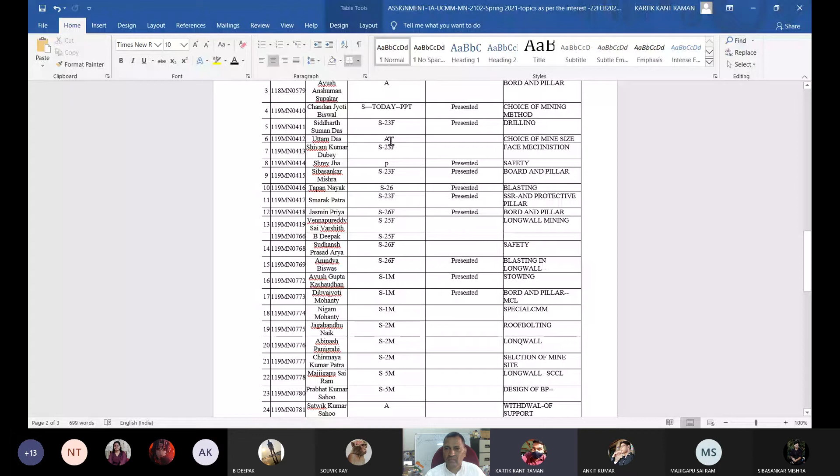Now you learn the skill of organizing even a conference. I wish that if not next year, at least when you are in final year, we will be conducting one national or international conference, as we used to conduct several times here in NIT Rourkela. So this is a training for you people. Now continue.

Excuse me sir, so can these people who are present already leave?

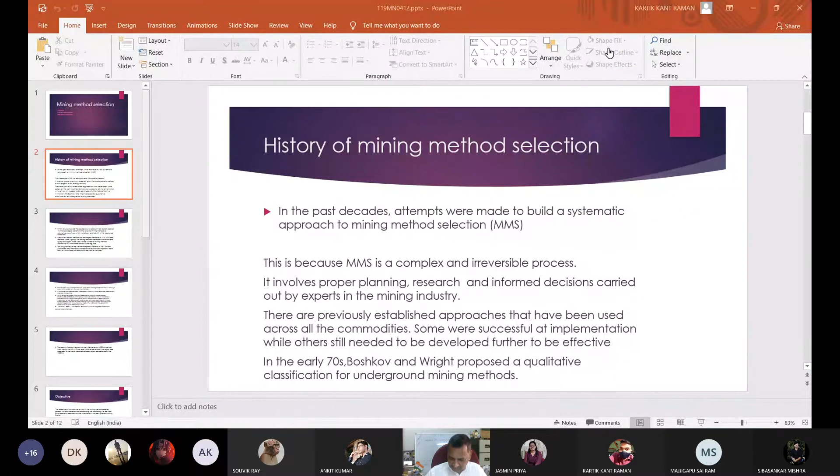Hello, there are so many options we have. Hello. Yes Uttam, yes I'm sharing my slides. So now Uttam is presenting. Yes sir.

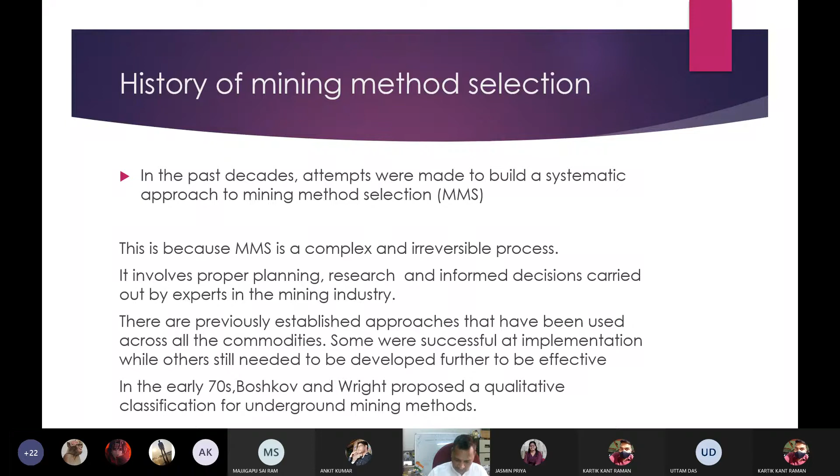In the early 70s, Boshkov and Wright proposed a qualitative classification for underground mining methods, which only considered geological and geotechnical factors applied in similar geological conditions. The selected mining methods as alternatives were those applied in similar geological conditions.

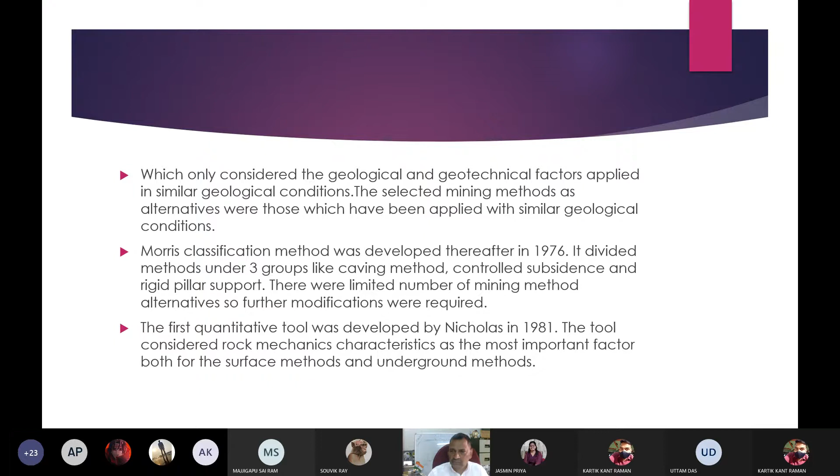The country that contributed the most information on MCDMs was Iran. Even though the USA, China, and Australia are some of the largest coal producers in the world, there has not been much concern about MCDM there.

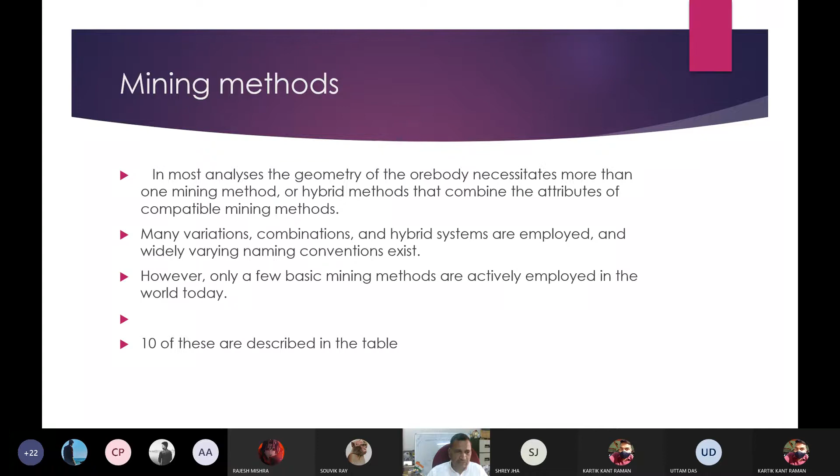In mining methods, in most analyses, the geometry of the ore body necessitates more than one mining method, or hybrid methods that combine the attributes of compatible mining methods. Many variations, combinations, and hybrid systems are employed, and widely varying naming conventions exist. Ten of these are described in the table.

Open pit mining (OPM) is the surface mining method for shallow, flat-dipping ore bodies that progresses deeper by mechanical means. Then there is block cave mining (BCM), an underground mining method for flat-dipping thick ore bodies that progresses upwards by means of self-sustaining cave progression. Then another is sub-level caving.

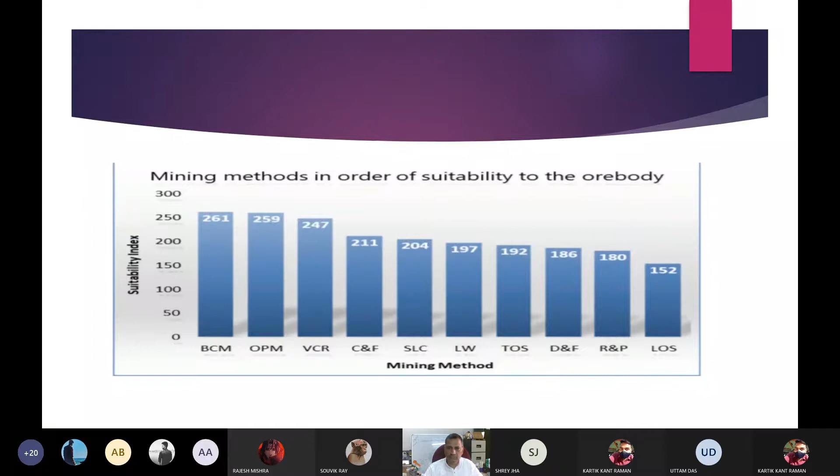This is the graph of mining methods in order of suitability to the ore body. The most suitable mining method is BCM, which is 261. Then OPM, VCR, cut and fill, SLC, longwall mining, and so on.

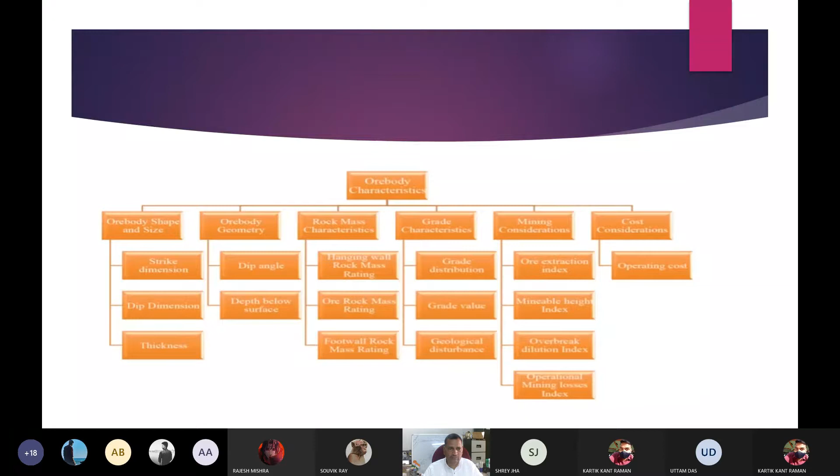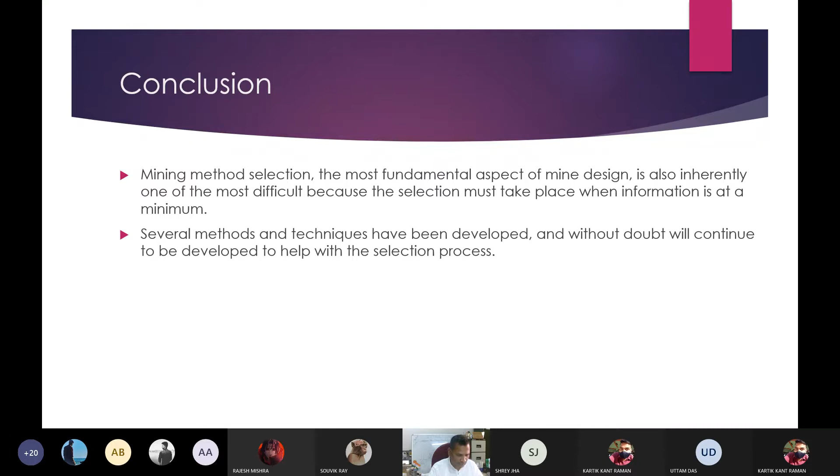Conclusion: mining method selection, the most fundamental aspect of mine design, is also inherently one of the most difficult because the selection must take place when information is at a minimum. Several methods and techniques have been developed and, without doubt, will continue to be developed to help with the selection process. Thank you.

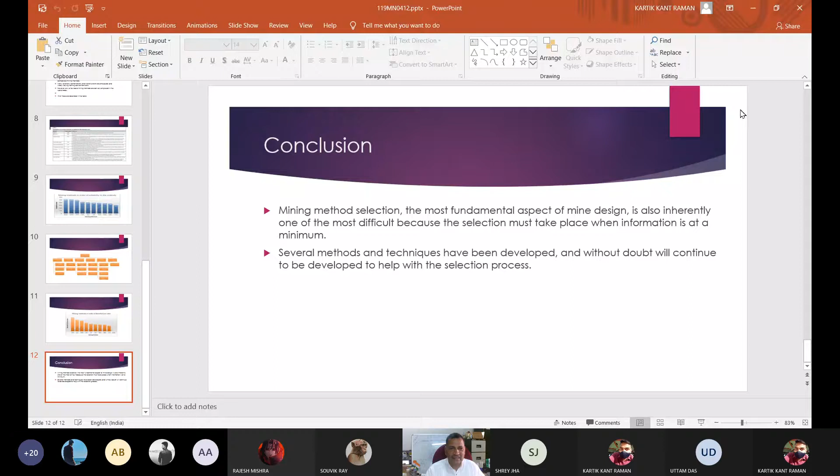What is the latest reference that you followed? Sir, I actually changed the slides a little bit, but I have the slide, I didn't share it with Kartik, so I wanted to share the slides. I understood it. What is the latest reference you followed? You've had 2-3 months for this assignment, you must know about these things. Is it a 2020 or 2019 reference, and which international journal format did you follow? Because these are the skills we wanted to improve. I hope you understood it. Yes, okay sir, no problem.

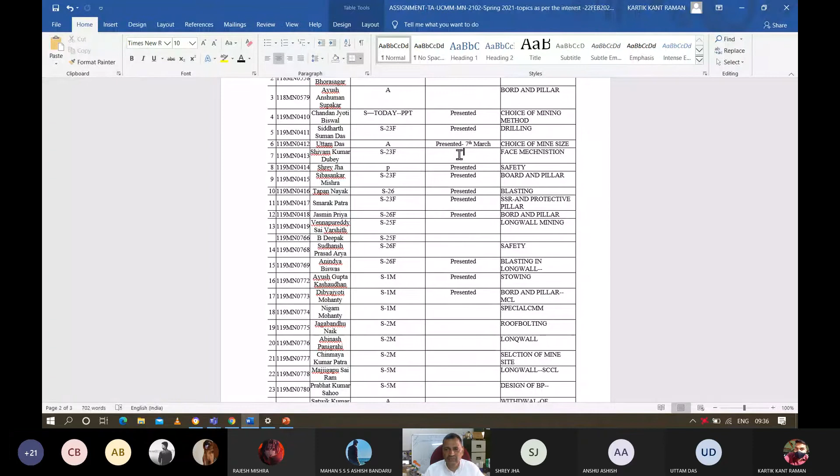So while others' PPT is displayed, please note down the trends in mining method selection, because there are so many parameters affecting the selection of mining method we have discussed, and the latest is that we can even utilize artificial intelligence or machine learning or that type of technique nowadays.

That is the AHP technique, you note down - Analytic Hierarchy Process, right? So you can see in our thesis, some students from BTech or MTech did projects under my guidance on selection of mining methods using AHP technique and other things. One PhD scholar, Bhanu Chandar, was also working on this - you may note down. Later he shifted, but initially he was working on selection of mining methods for different cases.

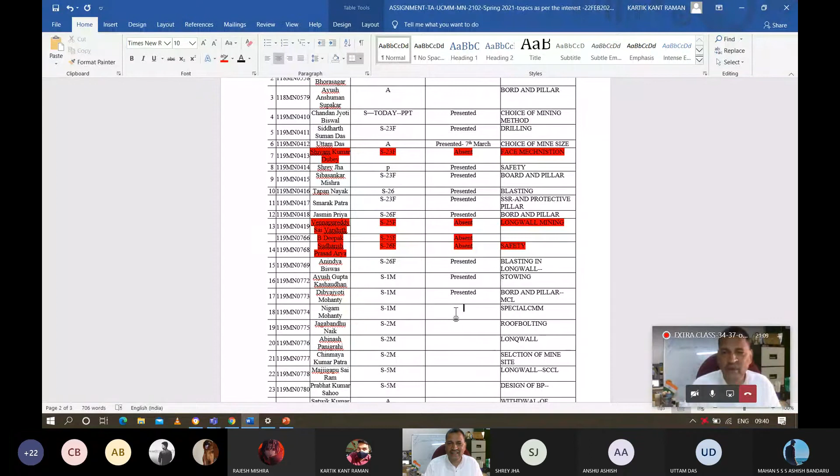Nigam, okay, Nigam. So Nigam is having some issues with his MS Teams. Actually, I don't know why. Everyone is having issues with MS Teams today. They are not responding to the problem. Let me know over WhatsApp. They can give their voice, your PPT, your YouTube link, you can play.

No sir, actually whatever YouTube link they have, they can play. Nigam, continue, can I present, sir? Yes, you first tell me the line.

Number 4 is Nigam. Number 5. Sir, Nigam is saying something, sir. No, let him say, but you tell me. Continue. Number 5. Who is number 5?

Jagabandhu Naik. Jagabandhu Naik, okay. Jagabandhu is number 5. Is he absent or present? Present, sir. Hello. Present, okay.

Then, yes sir. Jagabandhu, are you ready to present now? Continue. Yes, sir, Nigam, give it to Jagabandhu now. Display and continue. Jagabandhu, now time is 9:40.

What is the topic you will present? I will present, Jagabandhu, from 9:40 to 9:48. Completed, and 2 minutes for questions and answers.

These are the skills what we wanted to improve, so that you yourself will conduct later excellent international, national conferences. This is not to test your intelligence. You are all intelligent, my beloved students, right?

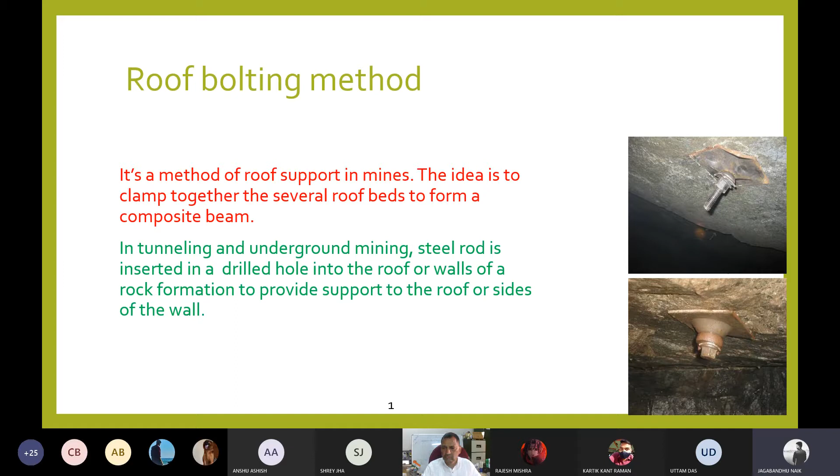Now let's see in Nandira Colliery UG mines. You can see here both roof bolts and bearing plates with their specifications. Considering these specifications, the design of roof bolts and bearing plates are manufactured. In Nandira Colliery, 0.8 meter of resin capsule followed by 1.5 meter of hexagonal roof rods was inserted in panel number WP3 and WP4 for roof bolting.

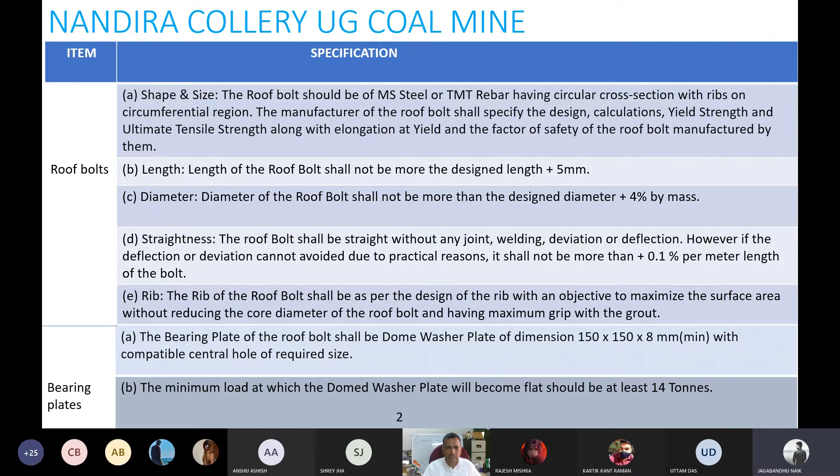Now, machinery used in Nandira Colliery. Hydraulic roof bolters are used for roof bolting in panel level WP3 and WP4. It is used to drill 27 to 43 diameter holes, and for flushing out the cuts from the roof, it uses high fluid pressure.

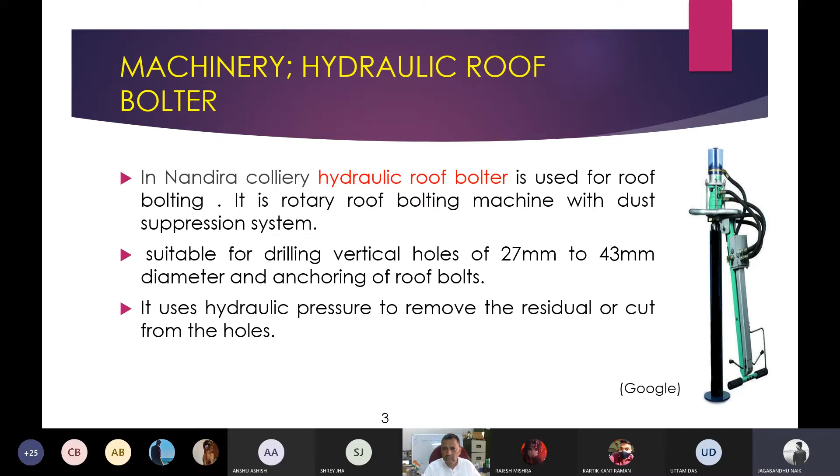Apart from that, universal drill machines are used in Nandira Colliery for roof bolting, as well as for anchoring the roof bolts. It's also used for short hole blasting. It can drill holes up to 38 to 63 diameter and 3 to 5 meter deep. It can work in gradient 1 in 4 and seam height up to 3.5.

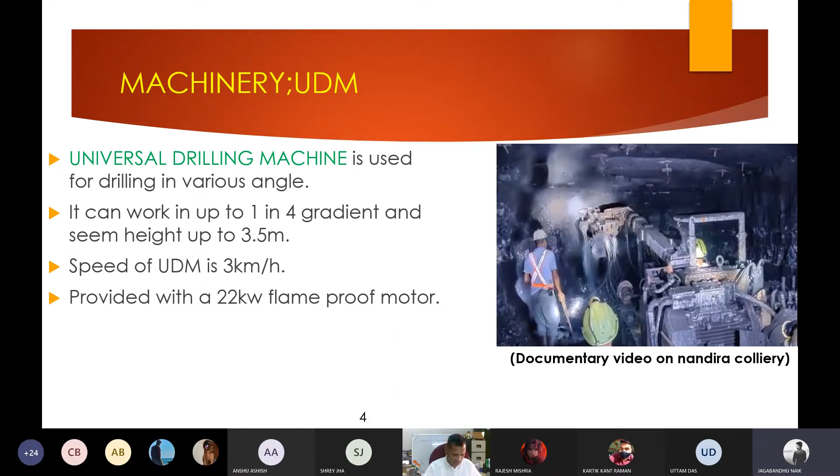To tackle this sort of problem, several tests are carried out using different lengths of rod and changing the shape of bearing plates in the Department of Mining, AGH University of Science and Technology.

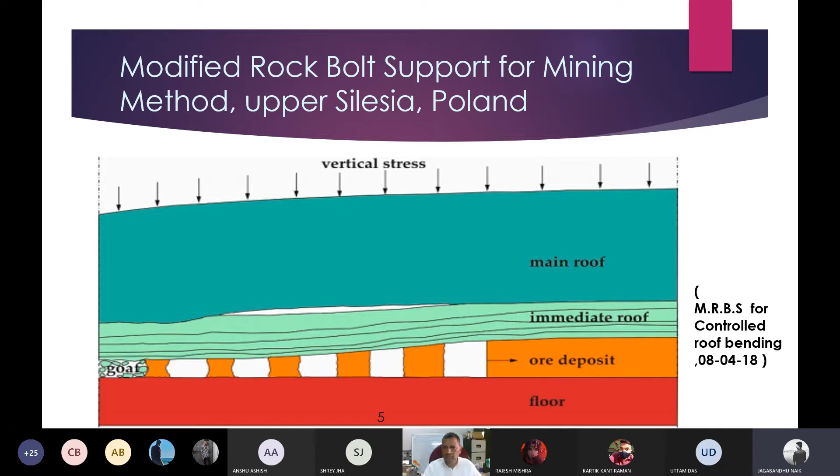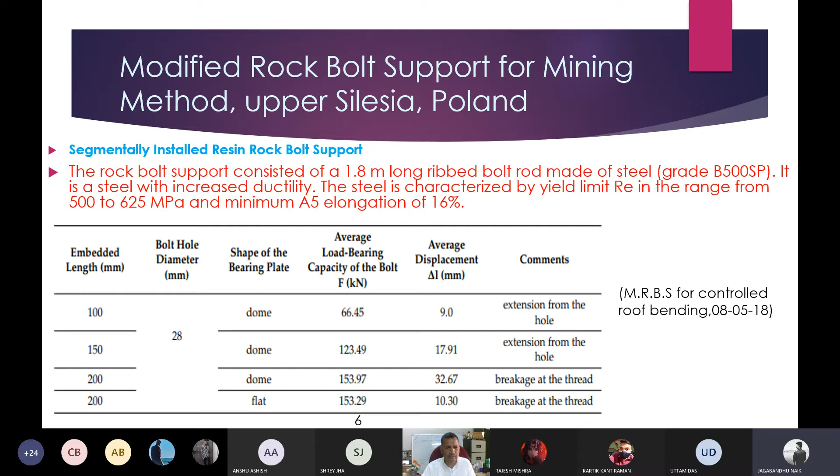Now, putting conclusion to my topic, the most important point to design a roof support system is to understand the roof condition, and for stability of the roof, it can be improved by suitable roof bolt support. And you can see these are the references I used for my assignment. That's all about my topic, sir. Thank you.

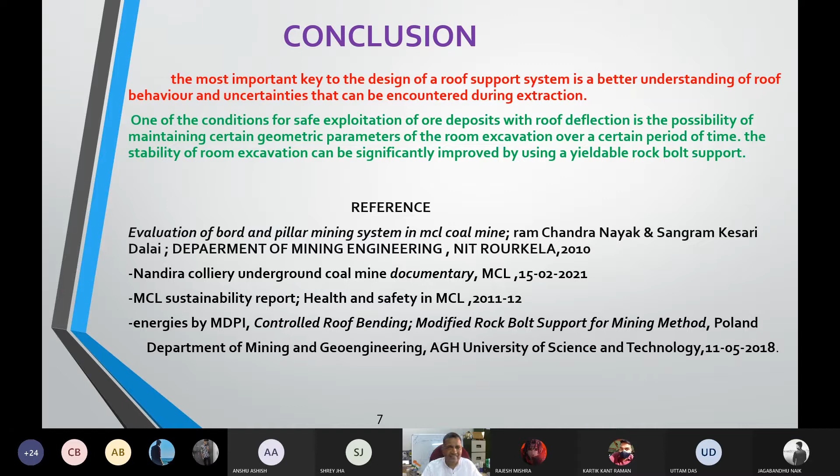Any questions for Jagabandhu? No problem, don't worry. Some of you, I thought, must have understood some good instructions to improve your skills, to collect the latest material, and make reading a habit of a good student. Okay, don't worry, whatever you could learn, you are at infancy now. Okay, continue, maintain the time and go ahead.

Anindya is next, sir, I will be presenting on his behalf. Who is presenting now? Anindya Biswas, number 3 today is Anindya Biswas. Yes, sir, I am presenting on his behalf. What is the meaning of you are presenting? The meaning is, sir, his net is sharing not the slide. I am sharing his slides and he is absent. No, sir, he is present. He is giving the voice. I am presenting his slides. That's right, that means you are displaying his PPT, right? Okay. Anindya, give me the access please.

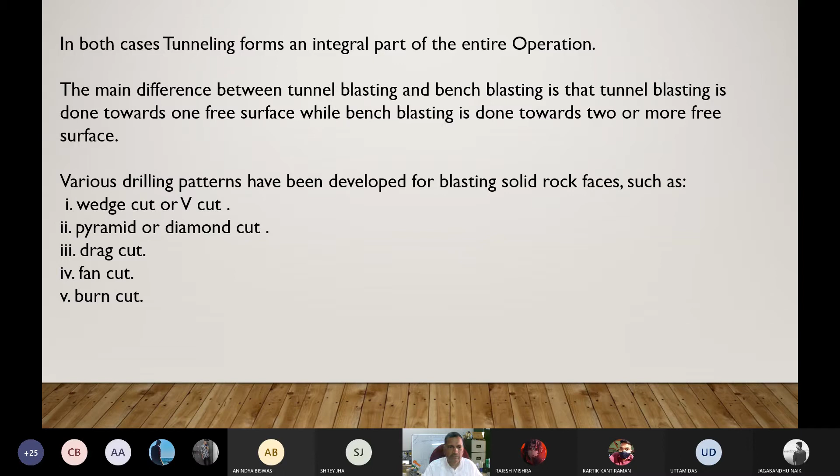Various drilling patterns have been developed for blasting solid rock faces, such as wedge cut, pyramid cut, drag cut, fan cut, and burn cut. Two important methods for blasting are detonation and shaft sinking.

Sequence of detonation: for both fragmentation and throw, blasting efficiency depends on the delayed sequence of blast or detonation. Delayed detonation improves loadability of the entire cut, contributes to better strata control, and reduces blast vibration.

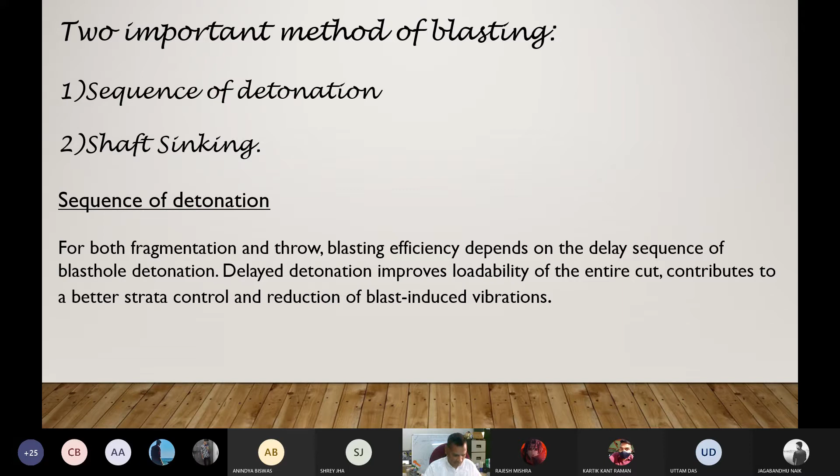Shaft sinking: in mining, shafts form a system of vertical or inclined passageways used for transportation of ore, refill, personnel, equipment, air, electricity, and ventilation. In quarrying, glory holes are used for transportation of materials, such as at Perak Hanjoong.

An important requirement in shaft sinking is to provide optimal fragmentation of the rock so that it can be cleared quickly from the congested shaft face area. Blasting operation is carried out against gravity, and the scatter of broken rock is confined in the shaft. It is common to use generous distribution of explosives throughout the rock using a large number of small diameter short holes.

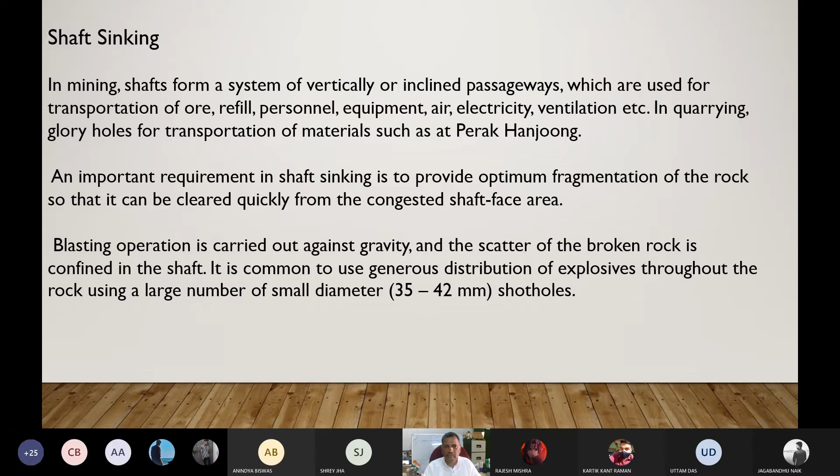Blasting in underground mines: underground mines extract underground metal bearing ore bodies. The excavation work for underground mines is usually divided into two broad categories: development and production. Development involves tunneling, shaft sinking, cross-cutting, raising, etc., so that the ore bodies are easily accessible and transportable after excavation.

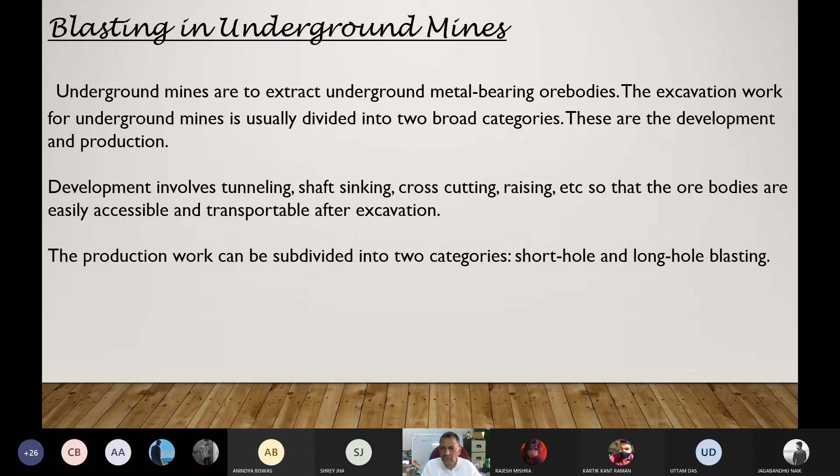The production work can be subdivided into two categories: short hole and long hole blasting. Short hole blasting: the diameter and length of shotholes are usually limited to 43 mm and 4 m respectively. Short hole blasting is usually used in breast stoping for narrow tabular ore bodies.

Have you understood the subject? Is it coal mines or metal mines? Sir, is it coal blast mine or metal mine? Sir, this blasting, what you are actually talking about, is it the coal mine or metal mine? Actually this is from metal mine. Then you have to repeat, that is not at all your topic. Go to the next person.

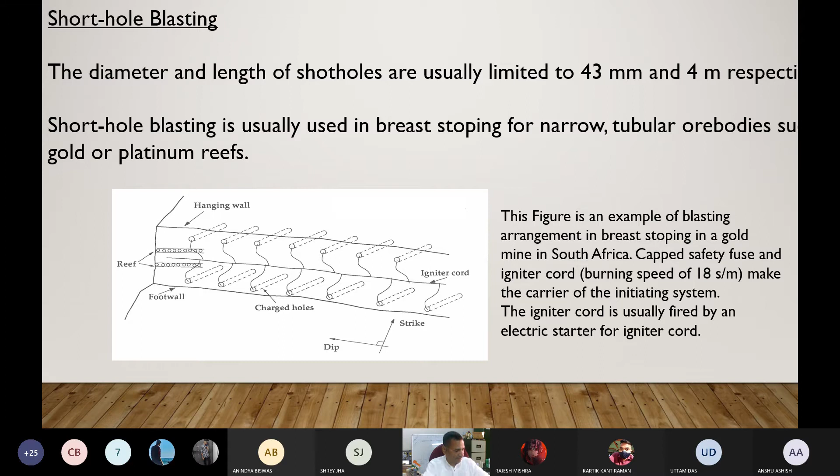Stop it, our topic is underground coal mining methods, not metal mining methods. Sir, it's underground. Karthik, go. So Avinash is next, this is zero marks for him. Go to the next. Avinash, this is very simple to understand, that shows how sincerely we could collect the material or understand the instruction. Avinash, you are going to present or I will present? I hope Avinash, every minute there should be some improvement, okay, we should not go back.

Who is the next man? I'm not allowed to take control here. Okay, you want the control, Avinash? I am giving you, so Avinash is next. Very good, Avinash is related to Longwall. Continue. Okay, I'm not actually getting the control here, so you can, when I say next slide, you can forward it. No, that instruction is already there with you people. No, this is the skill you should develop. Continue, okay sir.

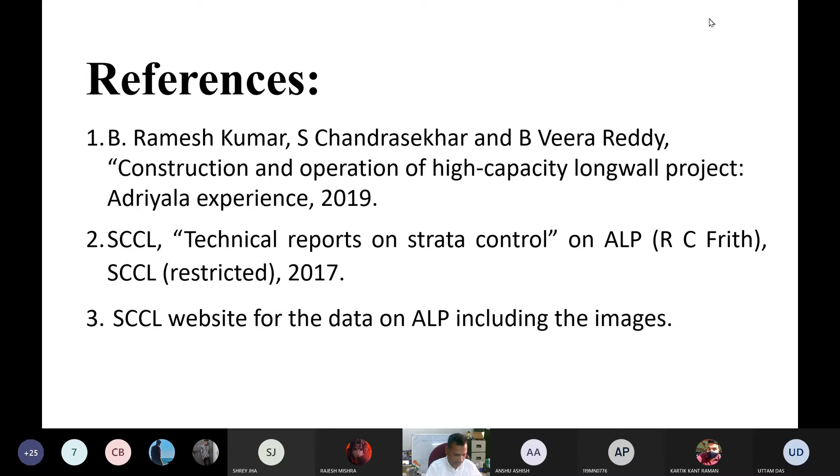Hello, next slide. The slide is changed, that takes some time. Don't worry, it takes a few seconds. So go ahead and start telling about it.

Yes sir, it's longwall mining for underground coal excavation. Starting from the day of independence to this day, coal is one of the most essential supplies for thermal power plants all over the world. Even though nuclear power plants and such methods have now taken over, in India there is a long and large range of thermal power plant necessity, so coal still remains the most essential one.

There are two mining methods, surface and underground. In underground mining, the longwall method has been the most essential, and it started on the global scale in the 1970s, but in India it has been more recent.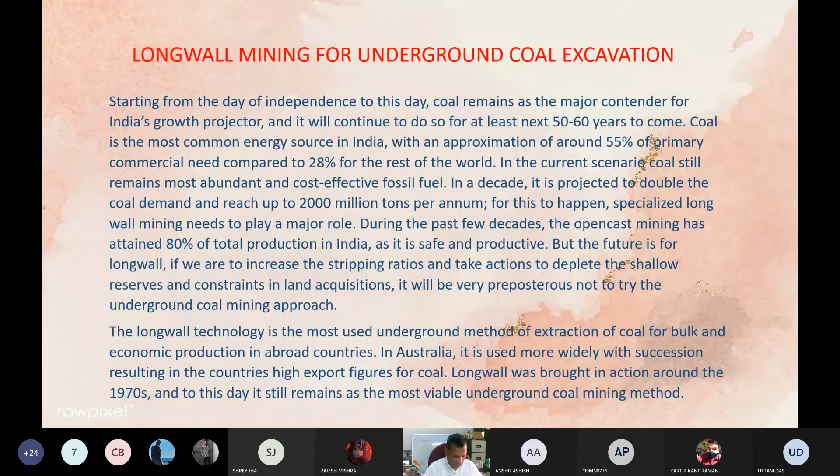Next slide please. So in India, in 1978, it was first accepted and brought into action. India had its first mechanized longwall caving face in 1978 at Moonidih under CIL. Subsequently, there have been 33 more longwalls in India after that. As a result, in 1996-97, the excavation of coal reached a maximum impact of 2.3 million ton excavation that season.

After that it has been a steep decline, considering the lack of development in mechanization and technology, and not well-educated means to work it out. There have been some problems since then, but later, the Adriyala Longwall Project was accepted in 2008 and started being worked on since 2014.

I have shown some longwall geometry here to show how improvements have been made. In the early 1970s, the width of the longwall face was 150 meters, while the length was 1200 meters. After the 1980s, there were gradual improvements. By now, in some countries like China and Australia, the width has increased to around 330 meters, and length can go as long as 3000 meters.

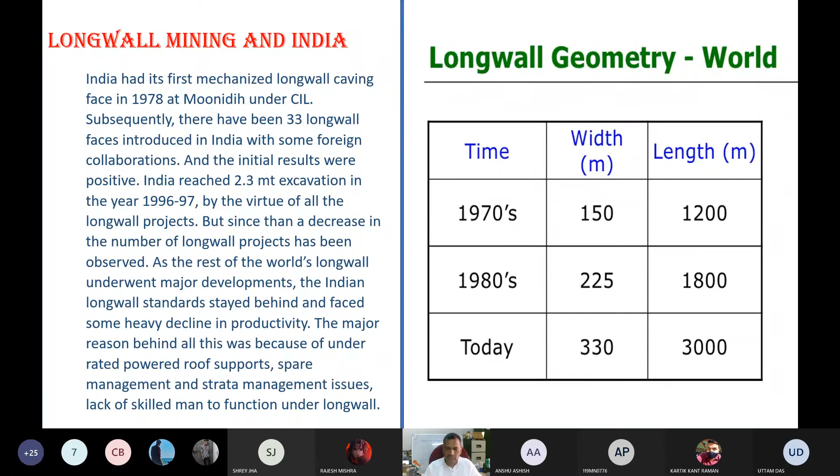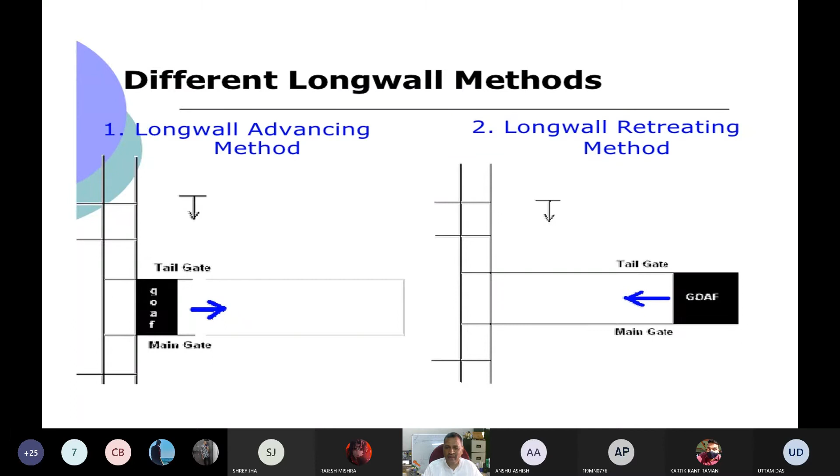Okay, next slide. So continue telling about it and make it very short, go to your important points. Okay sir, you try to repeat whatever was covered in the class. Okay sir, we know how a longwall face works.

So, about the Adriyala Longwall Project - more recently, as part of the underground mechanization planning initiative, SCCL started working on ALP, and in 2014 the estimation for 35 years was made, considering that the project was begun and brought into action. This was done with a lot of help from CSIRO Australia for detailed geotechnical studies, support capacity estimation, and finalization of technical specifications for modern higher capacity longwalls in SCCL. Also, some Indian institutes like IIT Kanpur and Kharagpur were brought in to help with this longwall project. Now let's talk about the specifications of ALP.

There have been some unique aspects about the Adriyala Longwall Project, one of those being the punch entries. Some punch entries have been made for direct access to coal from the open cast, directly connecting the underground to the open cast high wall. Also, 11 kilovolt power transmission to underground has been provided. Pre-tensioned cable bolting has also been employed, and it has been a completely automated system, which is completely different from the previously used longwall mines all over India.

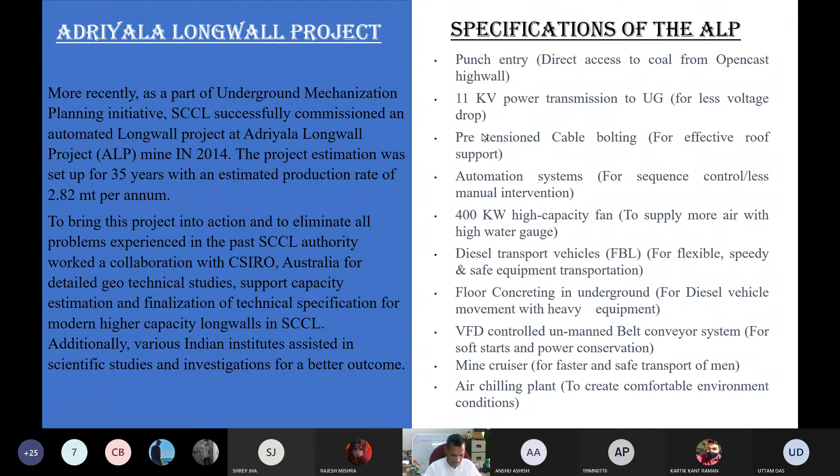In the next slide, I have shown some data comparing the earlier longwalls in SCCL with what Adriyala longwall mine did differently. The depth range in the earlier section was 60 to 225 meters, while in Adriyala longwalls it was 400 to 650 meters. For support type, earlier it was 4-leg chock shield, while now it has been 2-leg chock shield. Capacity has been increased from 360-800 to 1152, and width has also been increased. Life cycles have also increased. Considering panel length, it was very short earlier at 0.2 to 1, but now it has been increased to 2 to 2.5.

Face width also increased, as already said, and capacity is in million tons per annum. There has been a long and very much improvement seen from the previous ones. Also, shearer capacity and shearer mechanization were heavily mechanized, and as already told, it was an automation. So it was completely a success considering the effects.

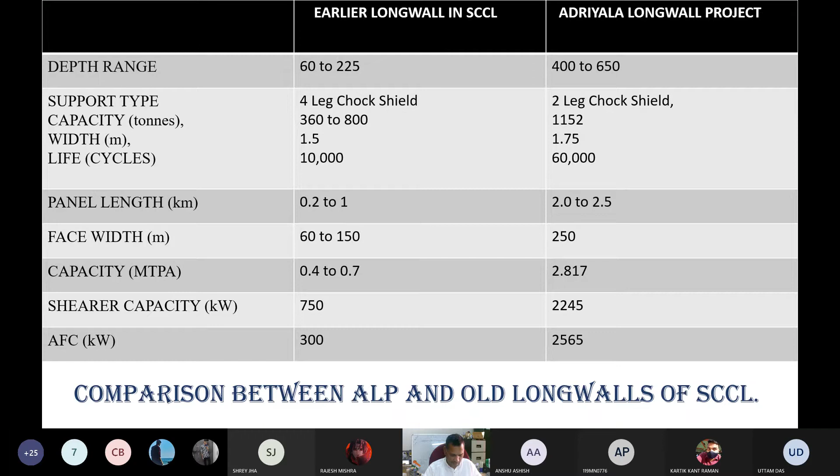Next, I have shown the layout of the Adriyala Longwall project and how the panel wall has already been excavated, resulting in a very successful amount of excavation. As we can already see, the Longwall panels and the success. Next slide.

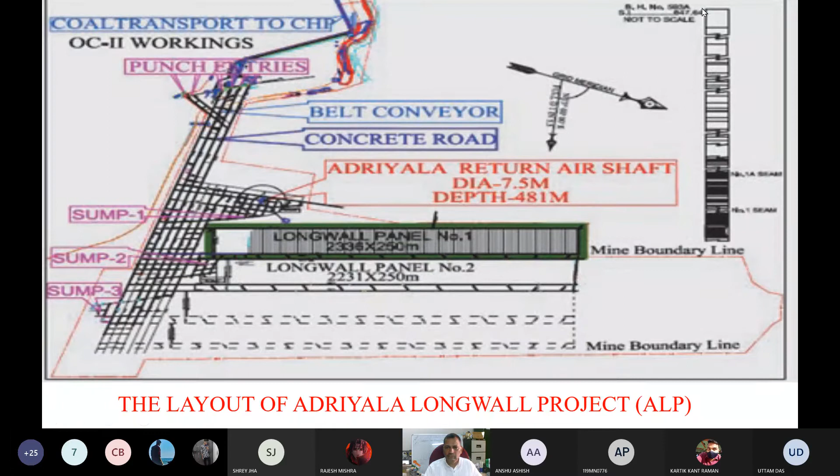Here is the Longwall face of the Adriyala Longwall project, and it's been completely mechanized and automatic. So we can also check the next one.

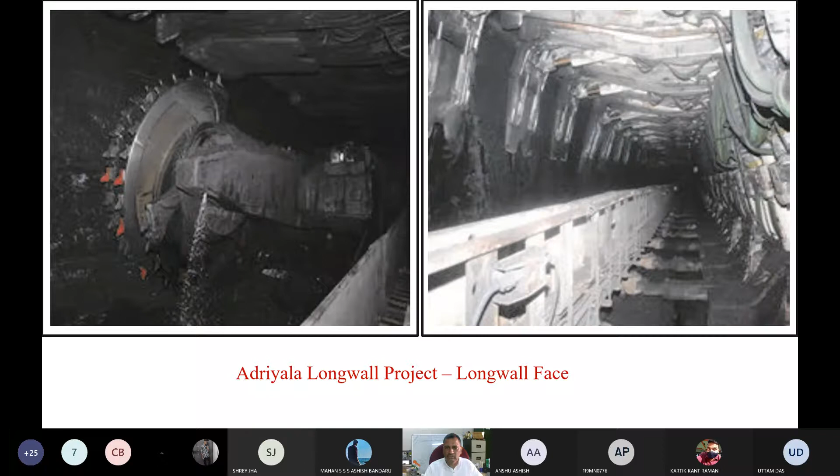Talking about panel one, the panel wall dimension was 2,336 meters to 250 meters in width, and the reserve of the panel was 3.38 million tons, which has been completely extracted by now. The highest daily production rate was 13,187 tons, and the highest monthly production was 2.53 lakh tons. It was a complete excavation of the panel.

We can see the concrete roadway for traveling, the diesel supports and shearers, and the punch hole, which is the most essential one. It has been employed, and it's a 35-year project, so it has more than 30 years to go from now. Hopefully it improves the quality of longwalls in India.

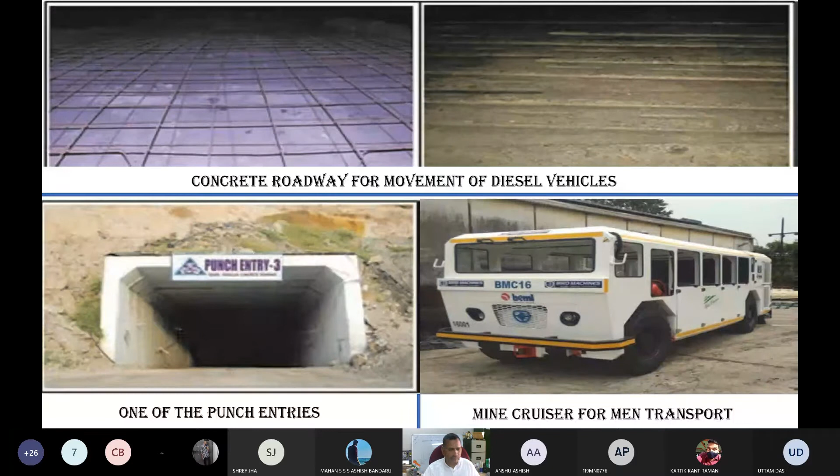By conclusion, I would like to say longwall mining is done successfully in all major coal producing countries, even in difficult conditions like highly gassy, hard roof, and steeply inclined seams. It is proved beyond doubt that longwall as an underground mining method is successful in India also, where it was introduced with proper spirit. So the more essential point is that suitable underground geological blocks need to be identified for introduction of high capacity longwalls on a large scale with the help of global operators.

And this is it, sir. Thank you, sir.

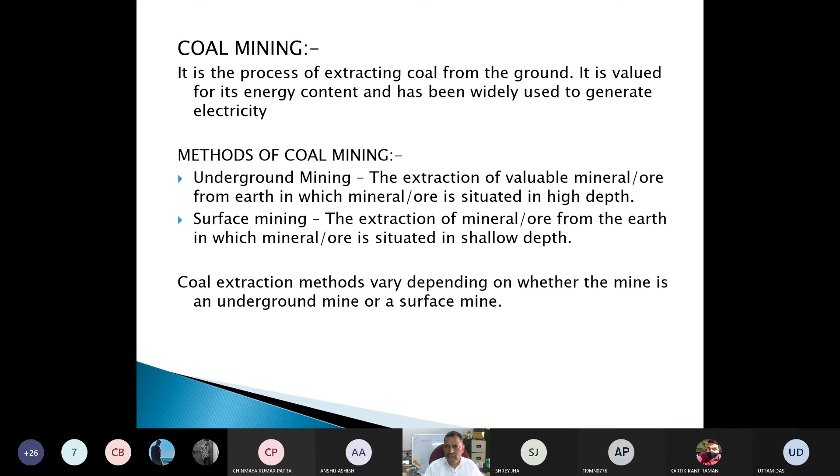Very good. Karthik, slide. Next slide. So I will start from the general introduction. Coal mining is the process of extracting coal from the ground, widely used for its energy content and to generate electricity. The methods of coal mining are underground coal mining and surface mining. Next slide, please.

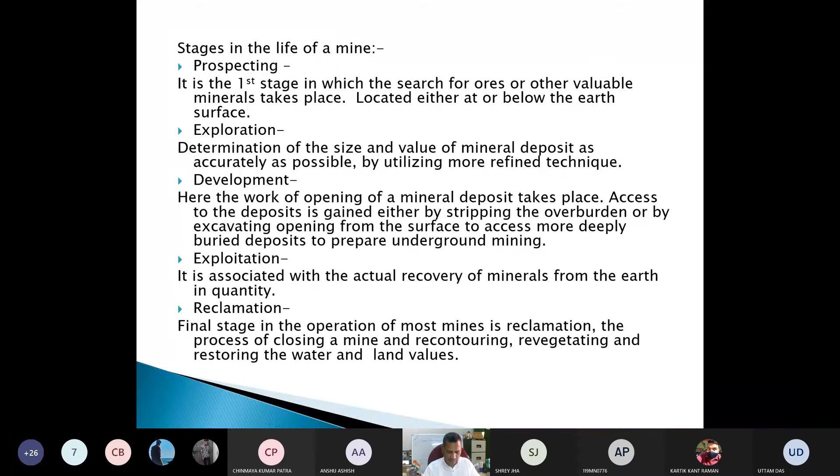There are 5 stages in the life of a mine. First is prospecting, where the search for ores and other valuable minerals takes place. Second is exploration, where the size and value of mineral deposits are determined as accurately as possible. Third is development, the work of opening a mineral deposit. Fourth is exploitation, associated with the actual recovery of minerals from the earth in quantity. The last stage is final reclamation, the final stage in the operation of most mines, which is the process of closing a mine and recontouring, revegetating, and restoring the water and land values.

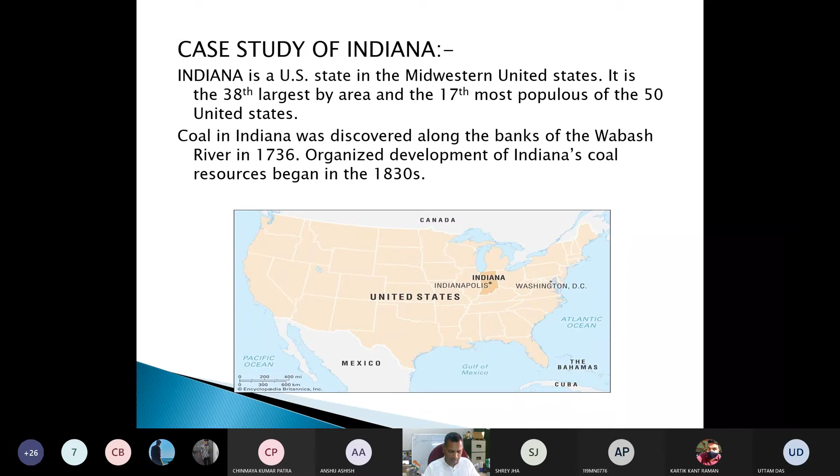Next slide please. Karthik, next. I will start here with the case study of Indiana, which is a state in the Midwestern United States, the 38th largest by area and 17th most populous of the 50 United States. Coal in Indiana was discovered along the banks of the Wabash River in 1736, and organized development of Indiana's coal resources began in the 1830s. Here we can see the location of Indiana in the United States from the map.

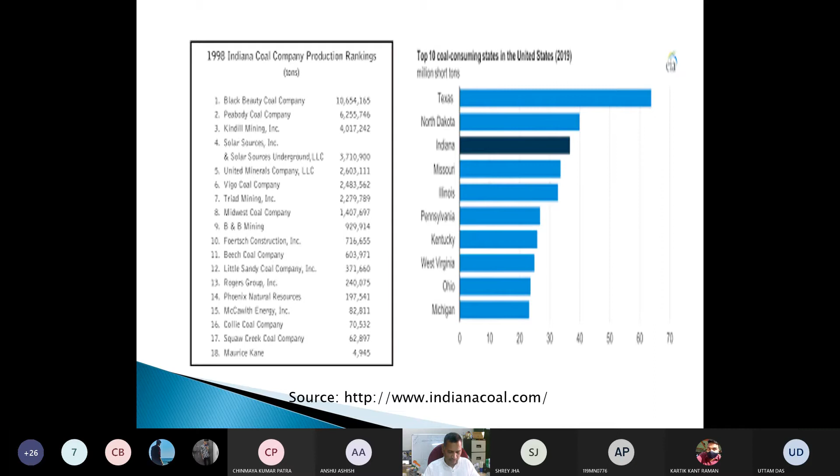Next slide please. And I have taken some mines in Indiana. The first photograph shows the number of coal mines in 1998 and its production by tons. The second photograph is recent, taken from 2019, showing that Indiana's coal consumption is in the third ranking. Next slide, please.

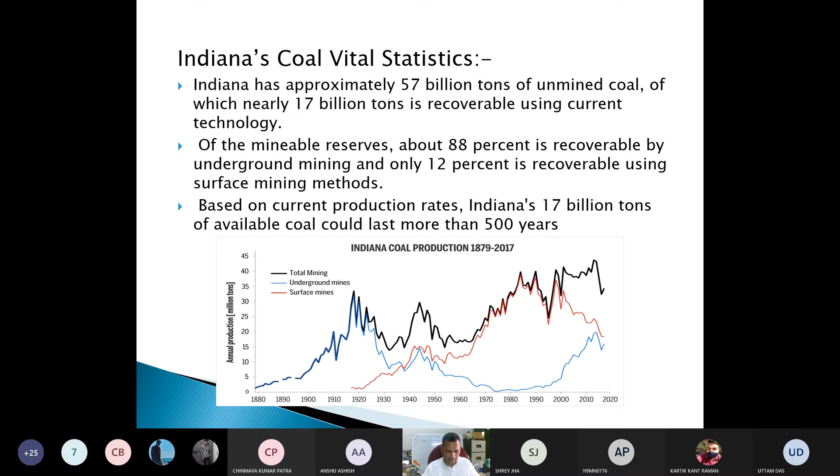Now we will go to Indiana's coal vital statistics. Indiana has approximately 57 billion tons of unmined coal, of which nearly 17 billion tons is recoverable by current technology. Of the mineable reserves, about 88% is recoverable by underground mining, and only 12% is recoverable using surface mining methods. Based on current production rates, Indiana's 17 billion tons of available coal could last more than 500 years. The graph shows total mining, underground mines, and surface mines from 1879 to 2017. I have taken this photograph from the internet.

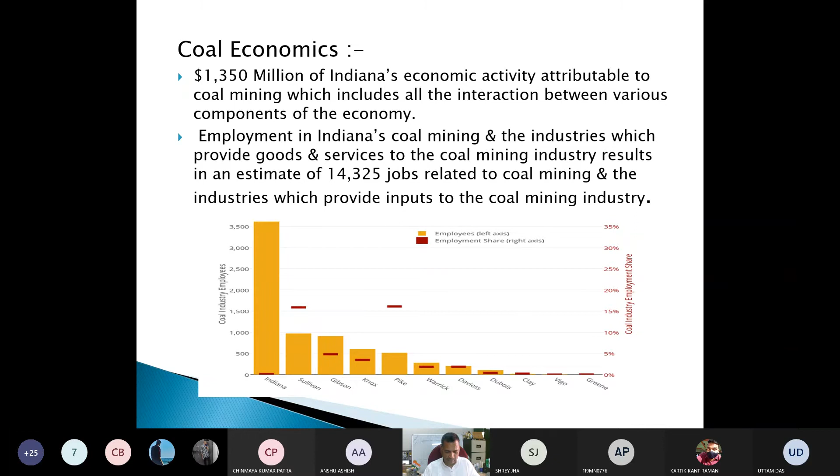Next slide, please. And the coal economics: $1,350 million of Indiana's economic activity is attributable to coal mining, which includes all the interaction between various components of the economy. Employment in Indiana's coal mining and industries which provide goods and services to the coal mining industry results in an estimate of 14,325 jobs related to coal mining and industries which provide inputs to the coal mining industry. This graph shows the coal industry employees, which I have taken from the internet. Next slide, please.

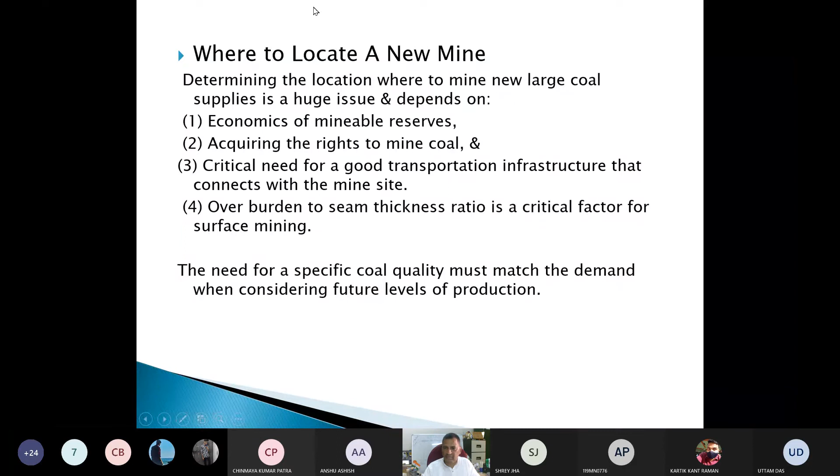These are the major issues for new mines. Next, Karthik.

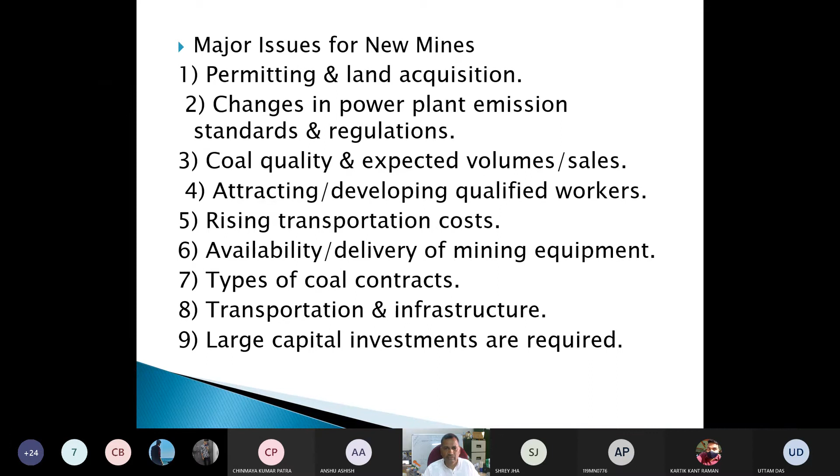The permitting process takes a long time for data gathering and regulatory approval. The Army Corps of Engineers has regulations affecting mining as well as post-mining reclamation. Permitting is a long process involving regulatory uncertainty.

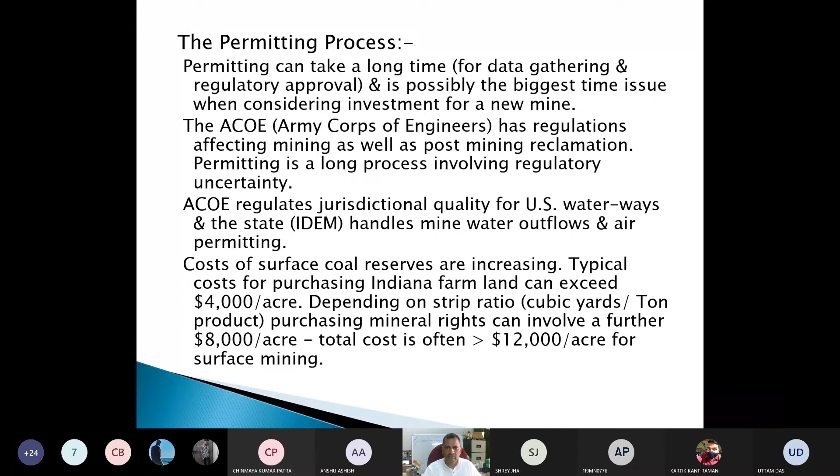Cost of surface coal reserves are increasing. Typical cost of purchasing Indiana farmland can exceed $4,000 per acre. Depending on the strip ratio, purchasing mineral rights can involve a further $8,000 per acre, making total cost often greater than $12,000 per acre for surface mining.

Next slide, please. These are the new mine guideline parameters. First, the time needed to find mineable coal reserves and acquire mining and mineral rights can take 5 to 10 years.

Second, to start a major new mine, surface or underground, an investment of $50 million to $300 million might be required. Third, in underground mines, geological characteristics like coal thickness, roof and floor strength are primary planning parameters. Underground mining gets difficult when the seam is less than 4 feet thick.

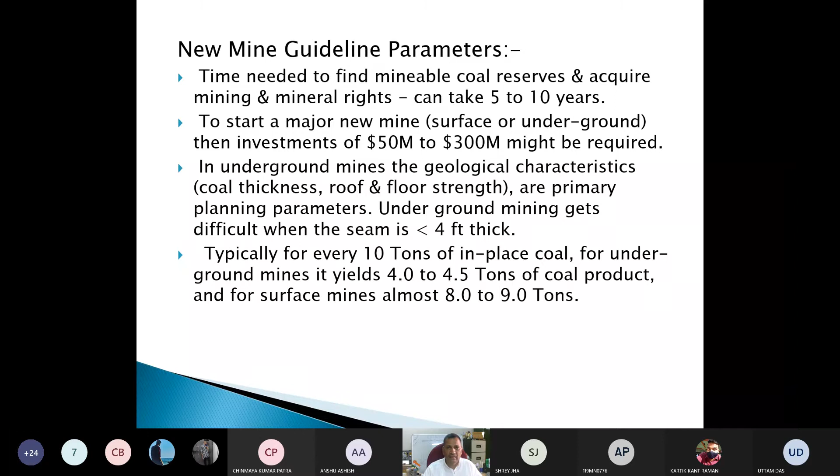Fourth, typically for every 10 tons of in-place coal, underground mines yield 4 to 4.5 tons of coal product, while surface mines yield almost 8 to 9 tons. Next slide, please. Now I will conclude here.

Indiana has an opportunity to increase its coal production with new demand from increased exports, new power stations, and limited substitution of PRB coal. Planning for new coal production capacity is a complicated and lengthy process involving technical investigation and regulatory requirements. Thank you.

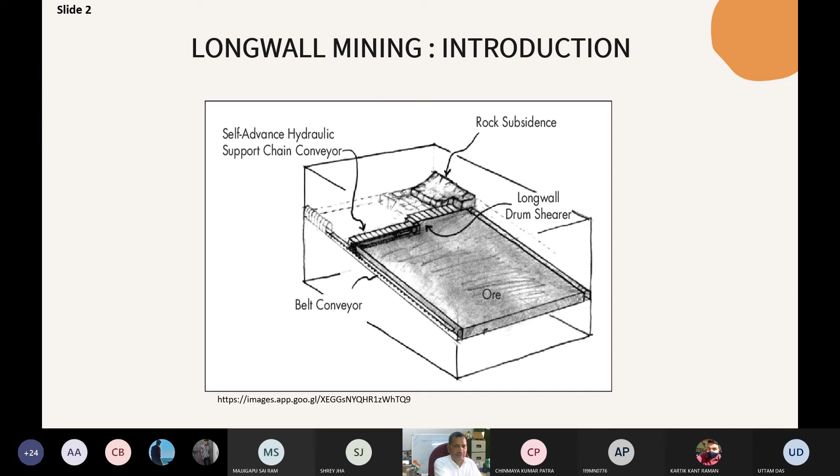Yes sir. Now I directly go to my case study on longwall mining in Singareni Collieries.

Singareni Collieries Company Limited is a government coal mining company jointly owned by Government of Telangana and Government of India. Singareni Coal Reserve stretches across 350 kilometers of Pranahita Godavari Valley of Telangana, with approved reserves aggregating to 8,791 million tons. Singareni Collieries is currently operating 19 open cast projects and 29 underground mines in 4 districts of Telangana.

Singareni Collieries pioneered mechanization of coal mines in India by adopting coal cutting machines far back in 1937. It replaced manual labor, road headers with armored face conveyors, shuttle cars, and highly mechanized equipment. Similarly, transforming more with technology, longwall mining was introduced in SCCL in the year 1983. Presently, 4 longwall packages are under operation.

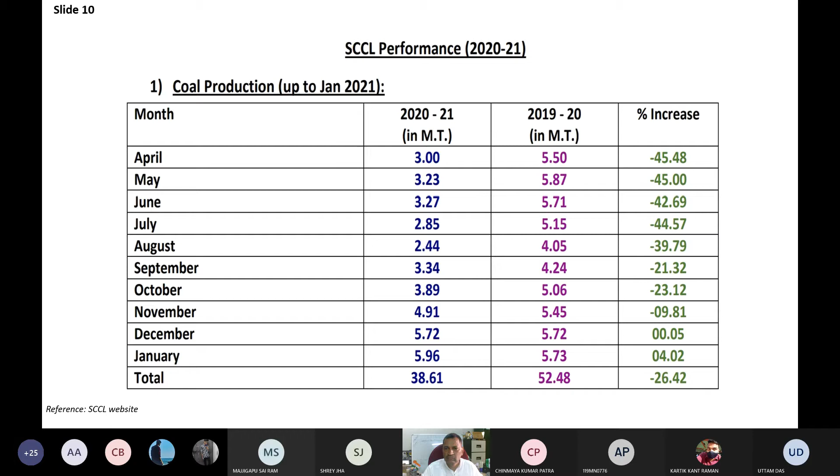This is the coal production by Singareni Collieries in the year 2020 to 21 and 2019 to 20. Let us look into the history of longwall package installation in Singareni Collieries Company Limited.

In Singareni Collieries, the longwall package was introduced initially at GDK 7A incline in 1983, and after successful completion of 2 phases, the equipment was shifted to GDK 9 incline, where the longwall phase collapsed due to inadequacy of support capacity. In GDK 11A, initially 3 longwall phases were planned with 450-ton capacity support, which also failed due to underrated supports.

Later, GDK 10A incline longwall package was introduced with increased capacity of powered roof supports, that is 450 to 800 ton capacity, where it was successfully worked, producing 3.5 million tons of coal. Similarly, longwall technology was introduced in many mines of Singareni Collieries in the successive years, which is listed here, which increased the coal production and ensured the safety of workmen and the mine.

SCCL has more coal reserves at below 300-meter depth. The longwall technology is the only technology for achieving bulk production from such conditions. The Adriyala longwall project has attained high significance in the Indian mining scenario at this point of time, and this is the first of its kind high-capacity longwall mine in the country.

Let me give you a brief background of the Adriyala longwall project. Construction of such an automated mine is not an easy task. It requires meticulous identification of coal blocks suitable for high mechanization and state-of-the-art technology. Unless a company can acquire highly skilled and motivated workforce and plan ahead for years, a feat like this is not achievable. Typically, carrying out the longwall mine is a complex process.

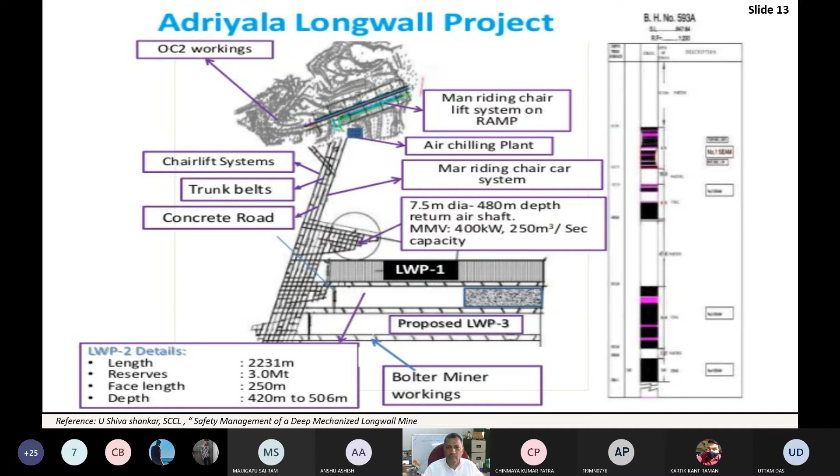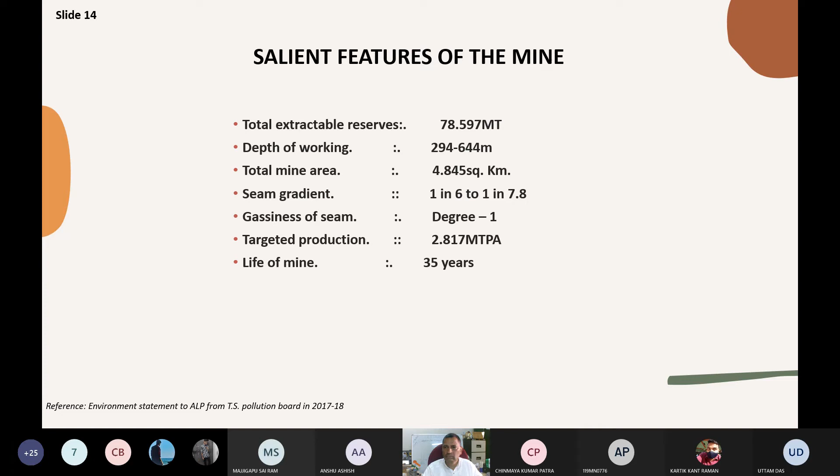This is the plan view of the Adriyala longwall project, which I have taken from the reference of U. Shivashankar's journal, where he presented at the Asian Mining Congress. These are some salient features of the mine: total extractable reserves present in Adriyala longwall project is 78.597 million tons, depth of working is 294 to 644 meters, and it works in degree 1 gasiness. Seam gradient is 1 in 6 to 1 in 7.8.

Many new technologies have been introduced at the project for the first time, like punch entries, 11 kilovolt power transmission to underground mines, and pre-tension cable bolting.

Yes sir. Also for others, when you give any figures like this figure, you should not write reference as HTTP, YouTube, all these things. This is not the way to write reference.

This should have a proper title, and if it is a reference like this, it can be anonymous, you should write ANON 2010 or 20, and give its full reference at the references section. You got the point? Any figure should not be kept like this. It should have a title, and then its reference if it is not taken or drawn by you. I hope I explained many times, but I wanted to tell you again so that you people learn to do that.

Can you repeat again, sir? Figure should be self-explanatory, and reference should not be written like this. Under bracket there itself you should give the author name, like Chandubai or Reddy, whatever, and the year, and that full reference will be at the back, last slide, or in the text it will be under the reference. I hope everybody followed. Yes, sir.

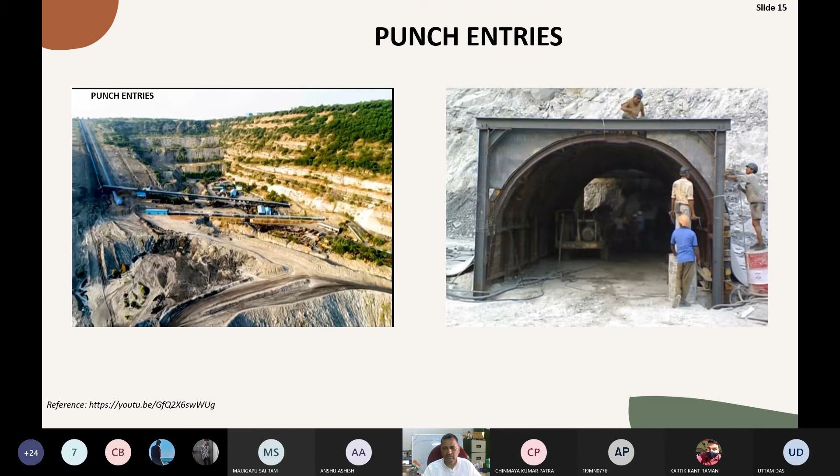Okay, coming to planning. But how does one find a suitable location for such a mine? The first step was to ensure the elevated area was suitable, one more point here.

Sairam, you should not copy and paste like this from anybody's slides. Why have you given this Mount Sopris instruments here? Why is this given? Why is this Robertson geologging given here? Sir, because they were involved in the planning. You should not prepare like this, this is a very, very bad way of preparing slides.

That is when their company people are presenting, they will do like that. This is you presenting, you are not representing Mount Sopris or Robertson here. Yes, sir, these companies. And this reference, why are you writing this HTTP link every time? That shows you copied it from there. All these slides, you have written yourself.

I took these photos, sir. So this should not be written like this, it should not be written like this. Go ahead. Yes, sir.

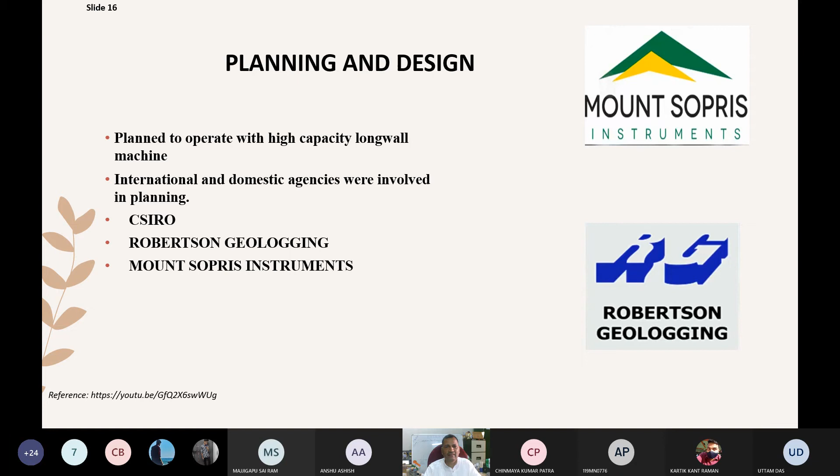Ventilation. Coming to ventilation, ventilation is a very important and most primary factor to be considered for safe working of the mine. The Adriyala Longwall project is planned to work in the depth range of 300 to 640 meters.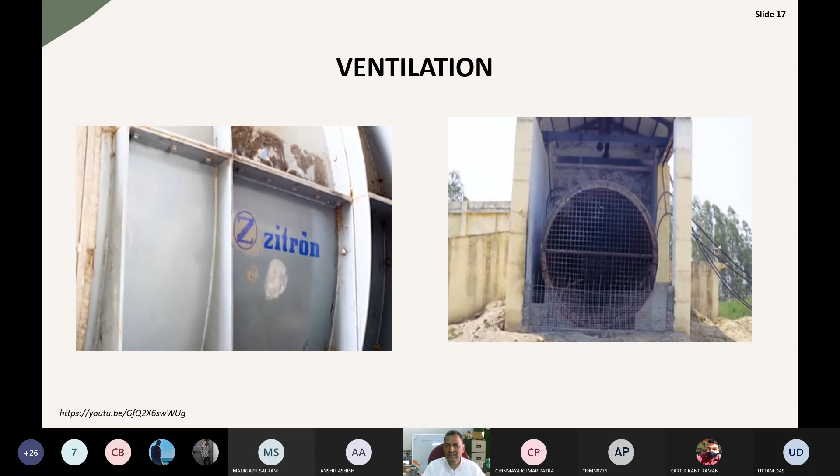Restricting myself to here, now I introduce you to Shantikani Longwall project, which is located in the southeastern part of Dorli Bellampalli coal belt. The area is mostly covered by sandy soil.

8 correlatable seams are present in the block, that are 1A, 1, 2, 1B, 3B, 3A, Salarjung and Ross seams. The gradient of the seam varies from 1 in 3.5 to 1 in 5, dipping towards northeast. All the seams proposed for extraction are considered as Degree-1 gas units based on available data.

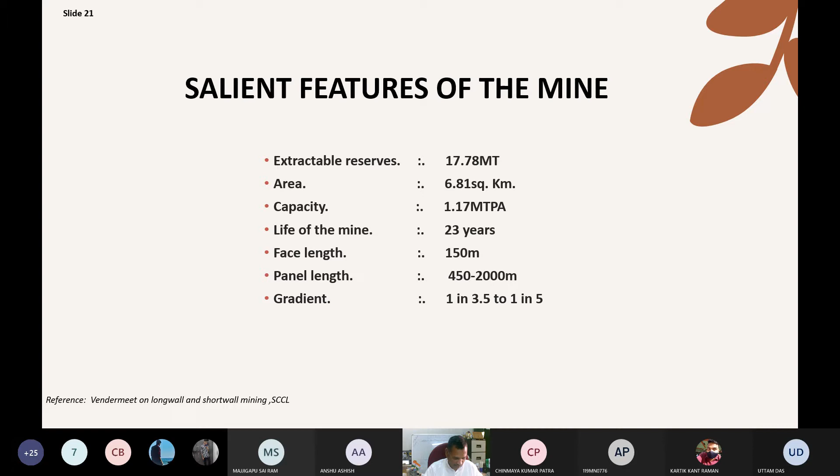These are the equipment used in our Shantikani Longwall project. Presently, 4 SDLs and 2 road headers are working in this mine. Salarjung seam workings are from 420 to 490 meters depth, and it is proposed to extract up to 670 meters depth in the future with continuous miner and longwall technology.

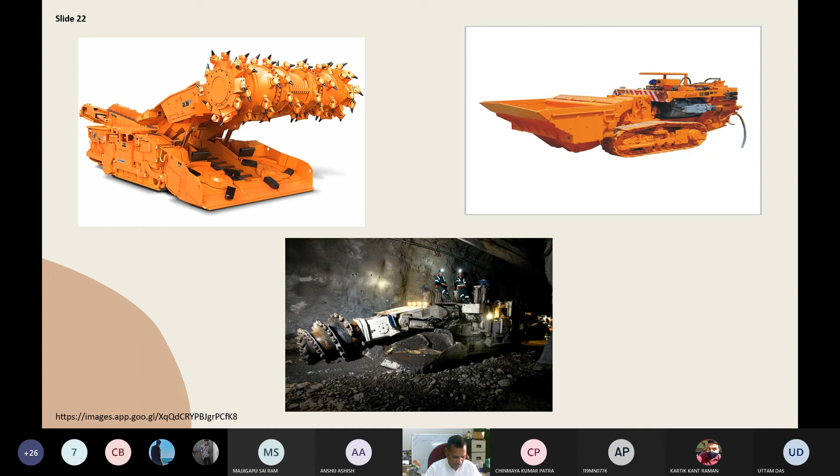Okay, let me conclude here. Longwall mining is done successfully in all major coal producing countries, even in difficult conditions like high gas seams, hard roof, and steeply inclined seams. It is proven beyond doubt that longwall as an underground mining method is successful in India also, so longwall will be the future underground mining method to extract large amounts of coal.

So these are the references which I used for making this presentation, and thank you. Thank you, sir.

Very good, Sairam. You tried your best. I appreciate it compared to many. Yours is one of the better ones.

Now, following whatever instructions or suggestions I have been giving, meanwhile let others continue, I am filling the gap. Then you can improve further in future. Okay, and any questions to Sairam?

Sir, this is a punch entry model, can you explain, sir? This is the first time they've developed this in Singareni, sir. How is this planned from an open cast mine, sir?

Very good. Who is asking that? Sairam, sir, myself asking this, sir.

You are asking, okay. So I was there when these things were being planned, and Reddy is my classmate. I was doing a lot of investigations in that mine. This mine, that name is given new, but it is nothing new, it is a GDK 10 incline only, 10, 10A and all those things. They made it, so very simple to understand, everybody note down just for 1-2 minutes.

That's why I asked you to spend 2 minutes after every presentation. Please note down, everybody. This is a very good, genuine point what our Sairam asked.

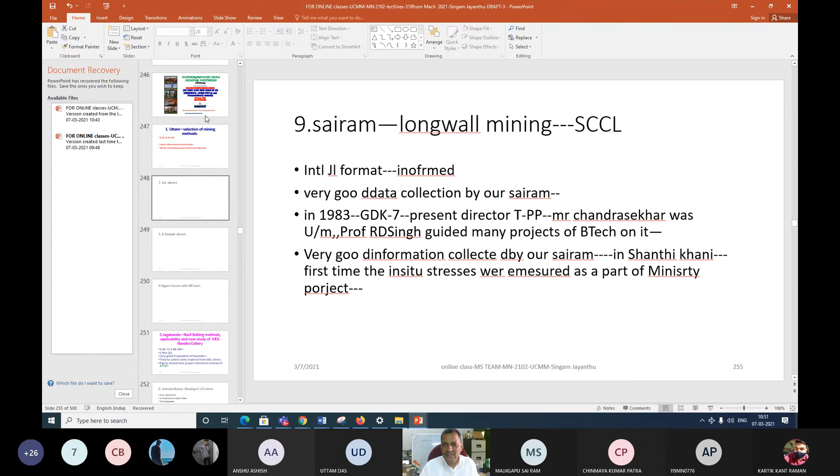For today, from session 34, 36, 37, depending on the time, your interest and patience, we will continue for 2, 3, 4 classes. Starting with Uttam, he presented on selection of mining methods from 9:29 to 9:34, about 5 minutes. He was supposed to present for 8 minutes but could not. Latest reference was not mentioned by him, and which international format was not mentioned. Sai at that time was absent, and Deepak was absent.

Nigam had issues with MS Teams, and Jagabandhu presented from 9:40 to 9:48, with 2 minutes for question and answers. It was a very good preparation with few slides, but again that was not good. So much material, but it should have been point-wise, not copy-paste of the text.

He tried to collect some material from MCL, which we appreciate, and the figure should have proper reference. Instead, he was writing that it was from Google somewhere. That is not the reference. In Google also there are so many papers given. You should write the name of the author and give the full reference later. If there is no author, then you should write anonymous.

Please note this down. This is what I want to improve, my beloved students - that skill, so that in future you yourself will conduct so many international and national events, and prepare yourself to be a chief or an important person in any industry or academics.

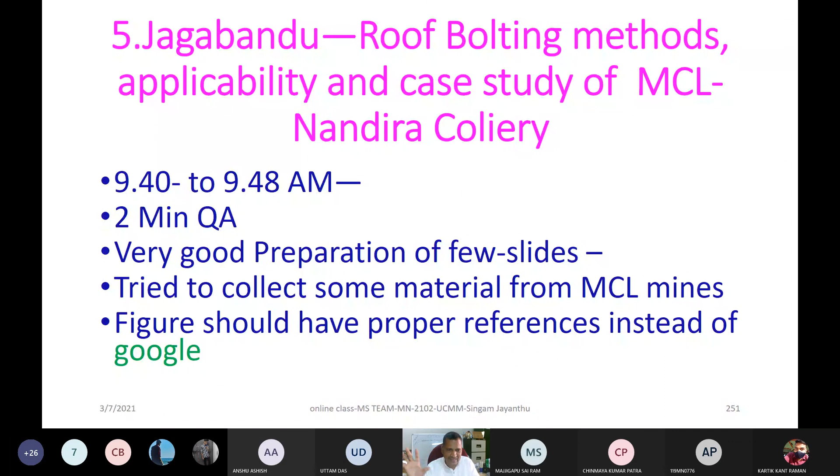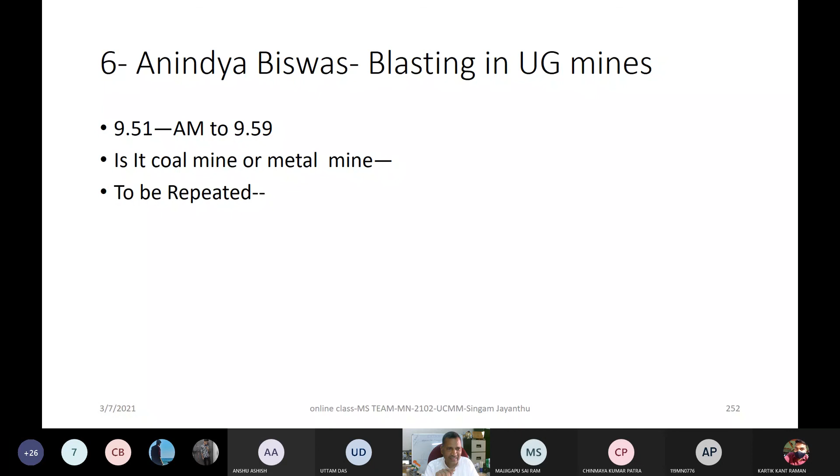Then Abinash presented from 9:57 to 10:05. Good recent references were given, 2019, from my classmate Chandu Bhai and others with whom we have been working on Adriyala and many mines, Singareni data. Instead of copying text, it can be made in short, point-wise form. More emphasis should be given to design of panel equipment and performance.

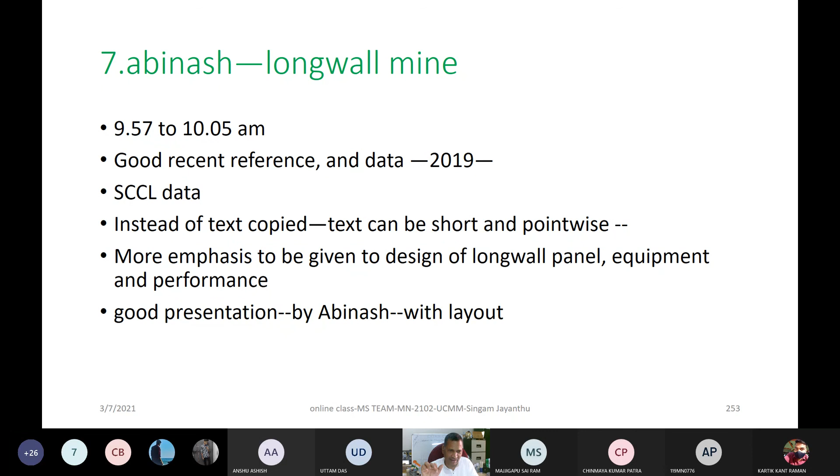Later our Sairam gave that, but he missed that point. Of course, I appreciate the layout and all that he tried to give - that confidence level is very important. And Chinmaya on selection of mine, there are...